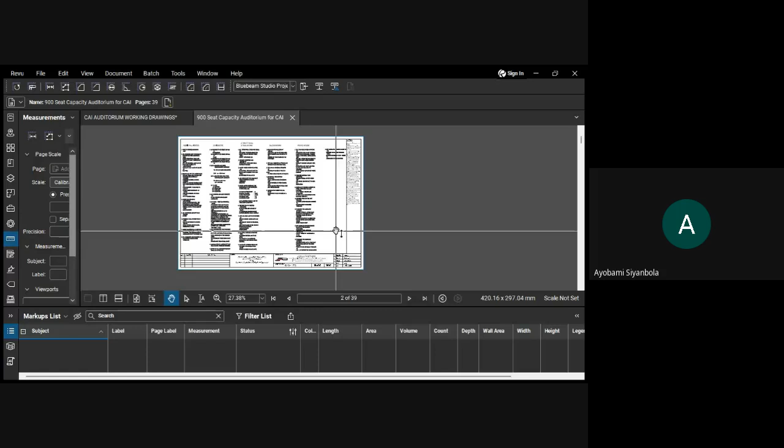So are we all good with that? If you have the drawings and the software, can we demonstrate that already? I will appreciate some responses though. We can just unmute and talk to react, to respond, and then switch the mic back off. I guess we are trying to make sure there is decorum, but even at that, it will really help us to be much more interactive. So do we get that? Okay, probably we should go over it again. All right, that's fine.

Okay, so we have launched the Bluebeam Revu software. Here is the interface. Even though it's possible, it may look different depending on your setup. All right, so there are two methods of accessing files, just like any other software.

So you come to File, you click Open, you locate wherever your drawings are. You click the one you want to work on and you click Open. The shortcut for coming to File is just Control O. When you do Control O, it brings up your folder and you navigate to the particular drawing. So this is me pressing Control plus O on our keyboard, and it brings that up. So that's one method, with the shortcut.

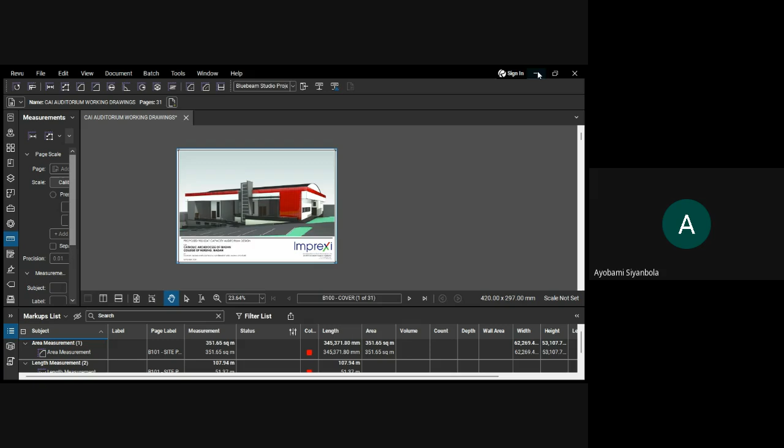Okay, sorry, can we all see my screen? Which of the screens are you seeing? Is it only the Bluebeam or... You can see the Bluebeam screen? Apologies, I guess I should share my entire screen so we can get this right. Let me stop sharing and I will reshare again. Apologies for that. All right, entire screen. So can we see the entire screen now?

Yes, sir. All right, so this is the folder like I was explaining. You come here, you right click on your folder. Is this the drawing that was opened before? Okay, let's pick another one since we already opened that one with the other method. So you come here, you right click, you open with. Opening with means using another software other than your default for opening PDF files. If I just click open, it will open with another software, which is Foxit PDF. So you come here and you pick Revu, and it loads your drawing immediately.

I guess we are fine with that, right? Yes, sir. All right, so this is the structural drawing. In making sure that... okay, let's just go over some of the toolbar items.

So now that we have loaded the software, you could see all these other items coming up. Initially they were blurred out, and you can't access them before that.

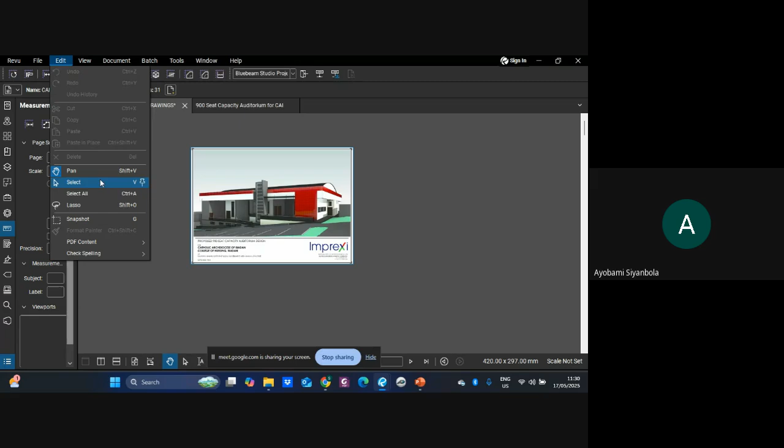All right, so for View, you can adjust this based on - one of the major things I would mention here is this full screen crosshair. Please activate it if you have it, so that it makes your measurement easier. Crosshair is a tool that brings horizontal and vertical lines on your mouse, which helps with precision in picking your item, just like in AutoCAD.

It comes preset, but if you are just installing your software, you won't have it as preset. So you go to view, you would have access to the full screen crosshair. Then we have grid system as well, and we have dimmer, and also as time goes on, we'll talk about some of these other things.

How it applies to measurements if you are doing measurements. All right, so we have documents, like I said, could rotate, you could shift, you could crop, you could do so many things on your measurement, on your documents as PDF files here.

So because of our time, you could do header, you could do footer. If you discover that, okay, there is a document that, oh, I didn't remember to add page, or this document doesn't have page, and it's a PDF document, you can do that easily. Yeah, you'll be amazed at what you would have.

So it has OCR as well. Like from the last session, I explained how OCR works. Even though presently we have some phones with OCR, this thing embedded in them. So OCR means a capacity to recognize text. It's a text recognition tool on documents or any file or pictures, whatever, such that you can sort of have access to text on the file.

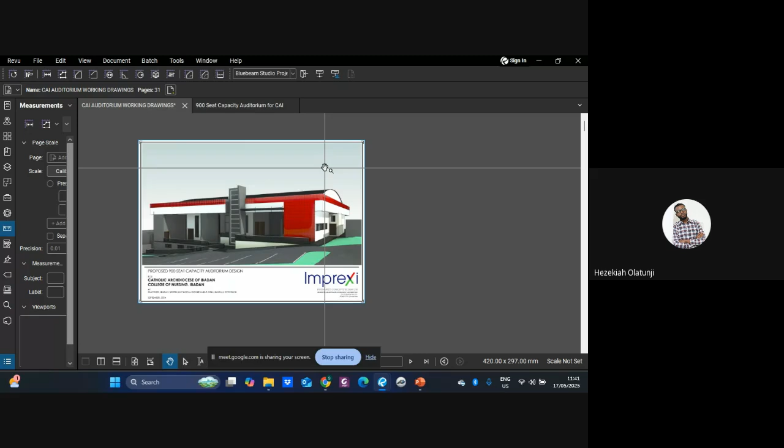Yes sir, actually I tried to import the PDF, and the page scale was showing, but the box to display the drawings page by page is not showing. So I thought maybe there is a setup that this particular thumbnail or something we are saying is not showing at all, like it's not displaying.

Is it possible you see something like this on your left? Or do you want us to come to that later? Okay, for the sake of others, maybe we should just come to that later.

Can you still hear me? Moderator, are we together? Yes sir. Okay, should we continue or? I think you should come back to it. Yeah, let's come back to that.

You can find your way around it depending on the time. But if you can locate the thumbnail session, you can possibly get what you need, or you could try another drawing as well. But that's strange, let's come back to it and we'll solve it.

All right, so let's go back to this. I think we were on ellipse cutout. So when we have a curved section and we're trying to cut out from the dots, as it were. So we have the count shortcut C - when we want to count an item, switches, toilet seats, windows, and all, we use this.

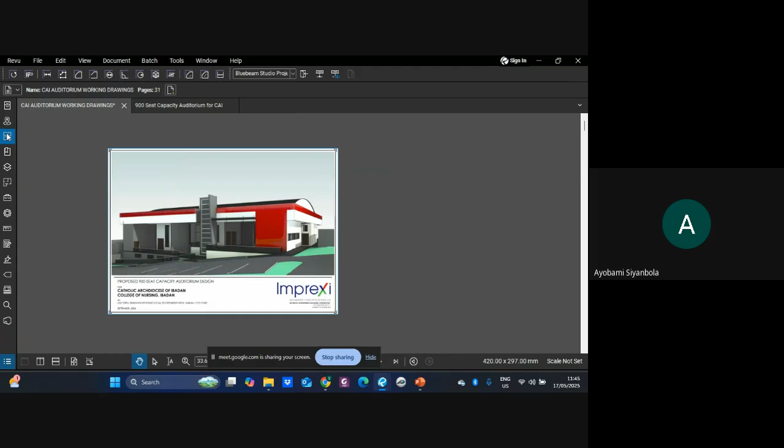So coming down, there is a section underneath. We're having this because I think from the last time, this will be the first time I'm opening this drawing again. From the last session, and still thanks to one of our participants, our guys that offered to give these drawings, because I made it an open call that, okay, don't let it look like there is a drawing that we can use and there are some drawings that we can't use. So it was at the venue that we got these drawings. I threw it open that if you know you have any drawings that you think we should work on, maybe it's challenging, or after this training I believe no other drawings won't be challenging again.

Yep, so okay, let me load this file - Sports Center. Just for some demonstration, we can see this, right? This Sports Center. Okay, we'll come back to the measurements.

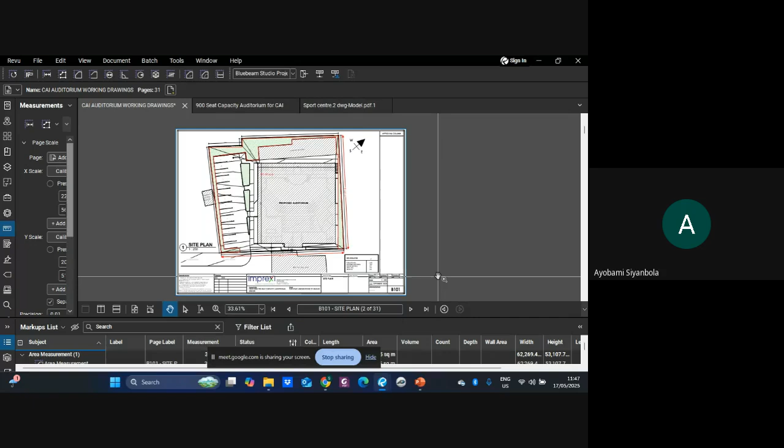The shortcut for that is Control right. When you press Control, then press the right arrow, it takes you to the next page. This is a workplace, so if you want to go to the next page on this workplace, you press Control right.

So using software and knowing how to use command shortcuts would aid your work to be more efficient. I know some of us understand what I'm saying. Instead of dragging my mouse, just this drag, that 2 seconds can impact my deliverables, can impact my delivery.

I cited an example to us from the last class. I thought the work had been done by a colleague and I was sure we would deliver. The client reached out to me some minutes past 6, the day before he was going for his meeting. He had even forgotten. I said don't worry, the work is fine.

Checking through the work, I noticed some slight renaming errors. The project had about 12 or 13 files, and about 2 of them were similar, so somehow there were mix-ups. Not that the documents were wrong, but there was a mix-up giving a file meant to be named D the value of B, and also...

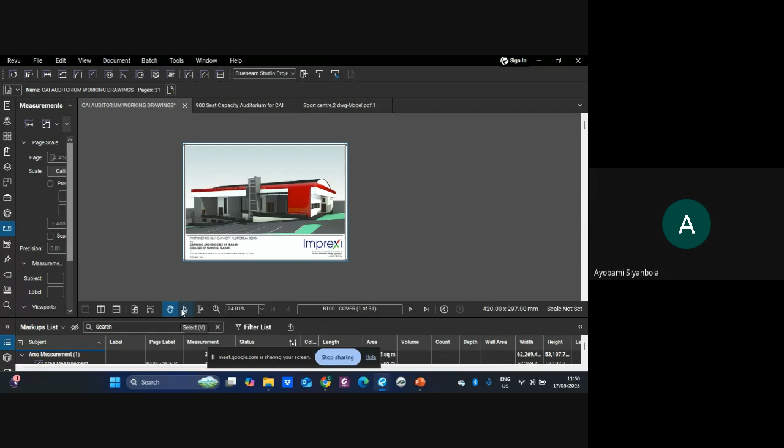Presently we have pan, this hand tool that moves is called pan. We also have the select tool here, so if you want to select something on the drawing or highlight it, that's the purpose. And this one can select text, if you want to copy a text on your drawing or design.

Usually you would need pan, because with pan you can click, you see the hand, and you can move around whatever you want to move around. Okay, do we have any question? Any question?

Mine is not a question, just a clarification. I've tried using Control and Arrow, pressing End, Arrow, and it's not taking me to the next page.

Click on the drawing, just tap on it like this, then Control Arrow should take you to the next page. It's not taking me. Okay, is your software activated?

Do you have any hatch on the tools, on some of the options? Is there a hatch on them? If there is hatch, no. Okay, we'll probably come back to that, but that's a preset. All right, any other question?

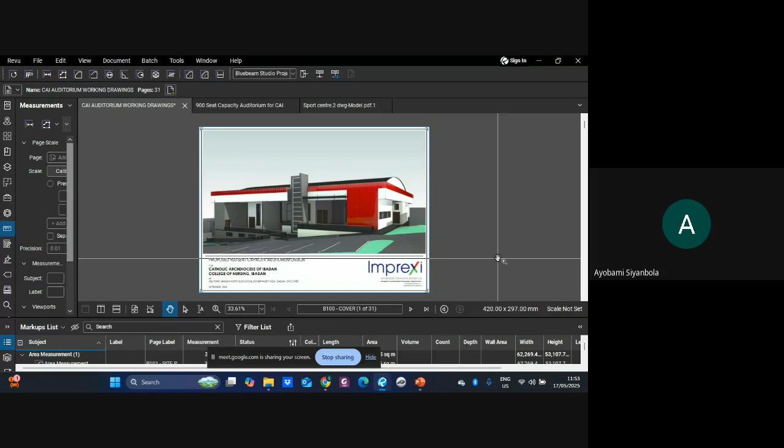So it can be effective and applicable to some other industries. Previous versions of Bluebeam, if care is not taken and your scale is not well set, can keep working and you'll get the wrong quantity without knowing. But even now, you can't do anything before you set your scale.

Let me attempt to measure the square area of this portion. So immediately I'm done, this is me picking area. Let me pick the rectangle, picking the 4 points. Immediately I'm done, what do we have on the screen? Apply scale to pages. So immediately I'm done doing that.

It is a must that you can't work on this without setting your scale. It's a very good way to safeguard us as quantity surveyors in making sure measurements are accurate, and some other software do have that in place as well.

Coming down, we'll come to the markup list section. We're having this because I think we did some things from the last session. Let me remove, should I delete them? I think I should delete them. So we can see that we are not having anything.

This session, if you don't have this, just come to this side on your system. Immediately you have the blue line, this thick blue line. Just select it and drag it up, that's when you have this section I'm about to explain.

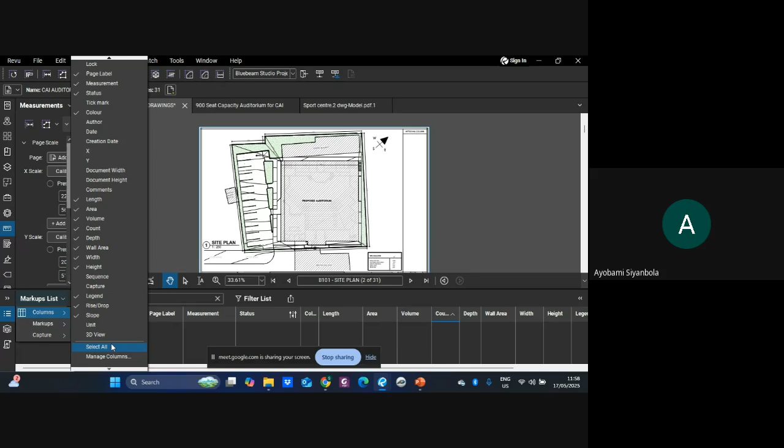So you can explore, and mind you we are still coming back to that. We can create our own column. And like I said from the last session, even from this Bluebeam view, without extracting to Excel or having Excel as a separate template, especially for projects that are not that serious, you can measure straight from your measurements and create a column whereby you can have your rates and a column for the amount, then export. Your estimate is ready. It's possible.

So we have custom columns. I guess we should come to that as well. Moderator, please let me know that. Thank you for helping note all these things. Please, what do you ask me to note? Custom columns, custom columns, all right.

So if you're on the same page so far, can we get a thumbs up or something? All right, there is a question here. Okay, a comment. All right, thank you everyone.

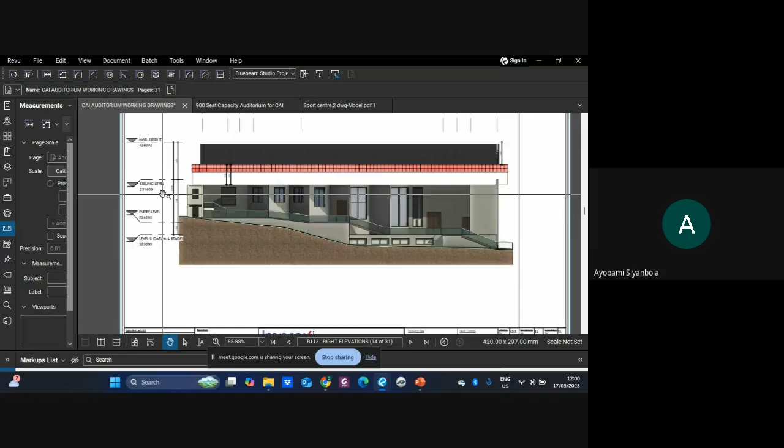Like I told you, for those that are just joining, this drawing was provided by someone, a participant, courtesy of QS Babatunde Quadri. So, this is to let us know that no matter what drawing you have, you don't have to be afraid, as if the resource person has a special drawing that he can use to get work done.

All right, so okay, I think we have the okay, but that's not too much. We have the schedules because we've been needing them. I think we have one other drawing. Okay, let me. Okay, this guy. Okay, I think we should have this one, a simpler drawing, regular drawing. But like I said, no matter what drawing you have, you can measure it easily.

All right, so, okay, that's fine. All right, so control home, we are here. Control next arrow, we are here. All right, so the other time I was saying that, okay, this is even better. I think because of the slants, we're saying what's the most important thing when we are dealing with measurement on Bluebeam.

Okay, I was expecting to see something but I'm not seeing. Okay, I now get it, because we have done the scaling. Just a minute please. I'm trying to remove the scale. So we have done the scaling before, so that we will understand some things.

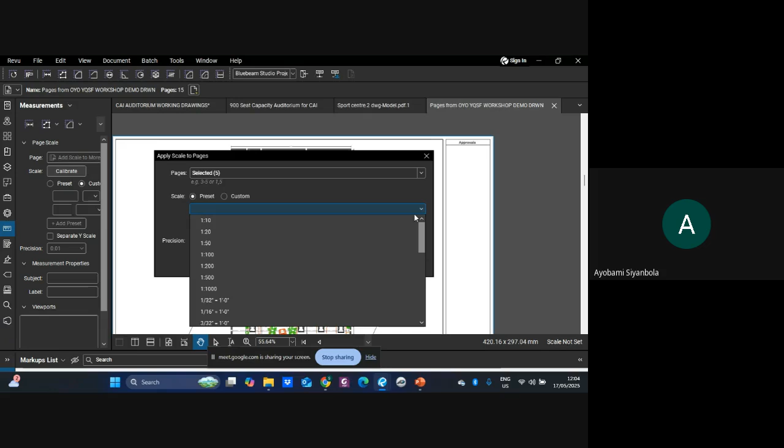Automatically it's on preset. Preset works when you have your drawings drawn to scale. We all know what scales are, scale rules. So just like we're digitalizing whatever we've been doing before to make our work more efficient, when you have your drawings to be 1 to 100, you pick that and you're good to go.

But yeah, I always have trust issues, don't mind me, so I would prefer to do custom scaling. When you do custom scaling, it saves you a whole lot of things. You assure yourself. So what are we doing in scaling, for the sake of those that don't know?

We have a drawing, and on the drawing we have some dimensions that are known already, but we don't know the scale the drawing has been drawn on. Just like in surveying where we talk about working from known to unknown, or unknown to known, now we are working from known to the unknown. Are we together?

So we are working from the known. How do I mean? We have a known dimension on the drawing. I want to know the scale so that when we work on the drawing, we are in tune with whatever the architect or designer has done on the drawing.

So immediately you come to custom, you have this option available, which means calibrate. We all know what calibration means, even on our phones we do calibrations at times. So when we click, this pops up. I intentionally leave this so you remember what you need to do every now and then.

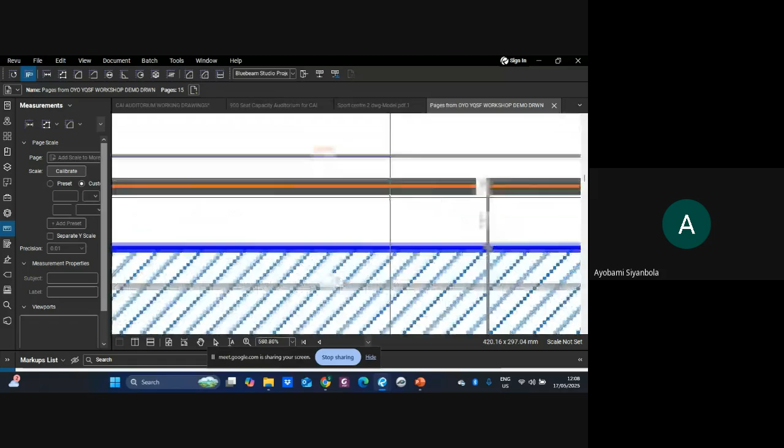So this dimension is starting from here, and don't forget we picked the dimension to be 30,450 millimeters. So we pick the first point, we go to the second point, and you click on the second point, and you define that point. Ignore this, there's nothing, don't worry about it.

So you input, because I'm working in meters, you convert it, that becomes 30.450 meters. Are we together?

Do you have any questions? Someone is raising his hand. Can we allow the person to speak? Please go on, Mutia Tokoyemi. Then Thomas is also raising his hand. Please, as much as I want people clear about this session, let's speak up. It's a mistake, ma'am, I'm not raising my hand. Okay, alright, Thomas, we can't hear you. Good morning, I just joined the platform now, it's not quite long I joined. Alright, okay, just follow us, the video will be made available for the parts you've missed. My name is Adigo Thomas, thanks for joining. Hello, welcome Tom, can you hear me? Yeah, we can hear you Thomas, thank you for joining. The video will be made available later for the parts you've missed, so just go along with us. Thank you for joining. So, do we have any other person with a question?

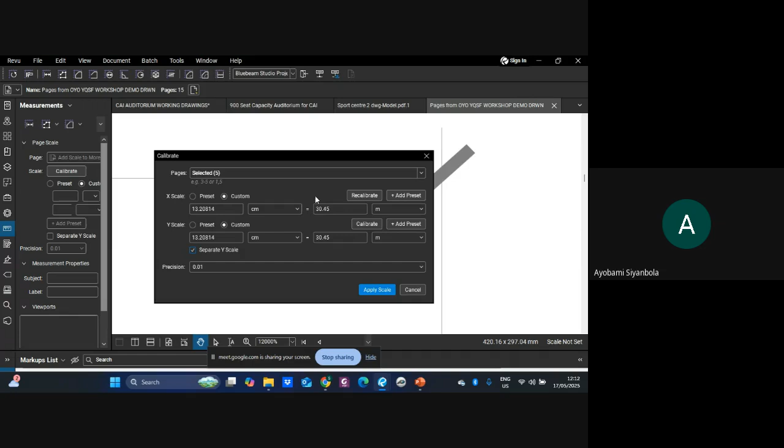Now you go to calibrate. You can see that this has been calibrated, it's just coming up to be recalibrated. If you have any issues with the first calibration you've done, you can easily pick this and go and recalibrate it. And if you think this particular calibration would be reoccurring on your drawings to come, you can easily add it to presets so you can pick them as you work. All right, so let's go with the Y scale, the vertical side.

Calibrate, same thing like I said last time: you select 2 points of a known dimension to calibrate the measurement tools. All right, so let's pick the longest part. This happens to be... is this the longest part? Okay, it's broken here.

I was wondering whether it's capturing everything or not, but I think we can still pick it. Pick this, 22.25 meters, or 22,250 millimeters. So you pick the first point of your dimension. Be very calm to pick that point so your dimensions will be accurate.

Oops, I think I picked 1458, but it's fine, you can actually pick the 1425. I just prefer to pick the longest one at times. All right, so for the sake of accuracy, I'm holding on to my control and picking that. So this becomes 5.8.

All right, so are we clear with that? I guess we should be. So precision can be set to whatever, but I've done 2 decimal places for my precision. All right, so this can be in millimeter as well. When doing millimeter, like we picked from the drawing, you just do 5,800. But instead of typing that long, let me quickly do it with my meter and move on. It's still the same thing, we are talking about efficiency here.

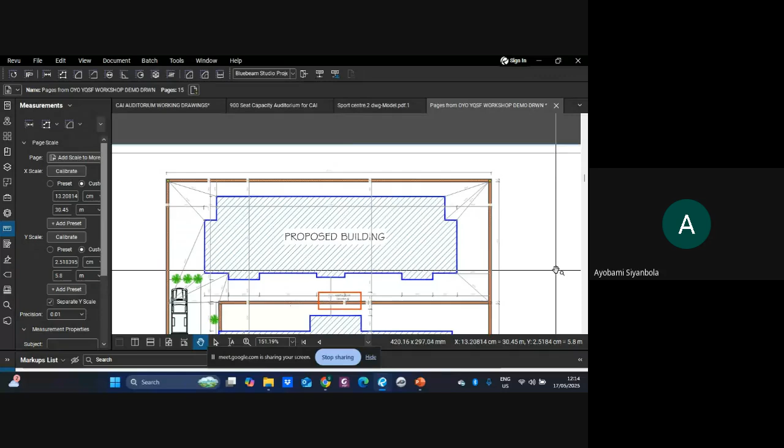We have the x-axis, so is equal to this, y-axis is equal to this. All right, so the cm and all is based on the movement on your screen, from centimeter. This is what it means. But now we have used that to determine and define the scale that we want the drawing and this page to be working with.

So now what next? I would advise that you click, you look for... let me see, I'm not sure we have the toggle. So let's say you look for tool, measure, length. But don't forget, when you want to dismiss a selected tool, you just press escape, that works. So let's say we want to do L, let me use shortcut Shift Alt L. You can see that I have my length popping up here already.

Are we together? All right, so now we want to confirm if our calibration did work, if indeed our calibration worked that time that we picked it. So this is when we will know.

Did it really work? Okay, with some little precision. So that's why I was saying the other time, okay, you have done 0.01 precision. But do you get the gist? Do you get what we are talking about?

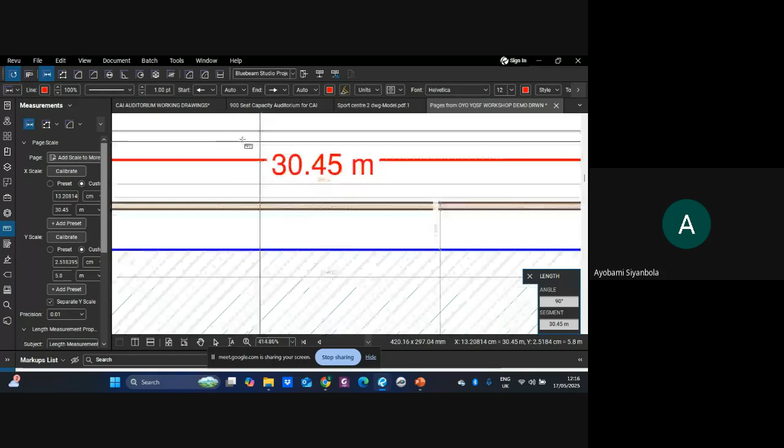So my L, this thing is still activated. Let's confirm this other guy too. 5.8. Can we see that? We could go on confirming. We've confirmed that one. Okay, let's confirm this small guy too. 0.1.

So I've used this drawing that has no scale set to explain that. So I'll go back to the initial drawing now. So there is a challenge here that I need to explain about. Okay, maybe we should just recalibrate. I think that's what we should do. Let's recalibrate. So this is what I was saying the other time.

You could say that, okay, we have done the scaling before. So let's say we want to recalibrate the x-axis. Just for the sake of emphasis, let's pick this guy, 44,623. And we can see that this guy is not on a straight line like the other one. That's why I said this is a perfect example for what I want to explain.

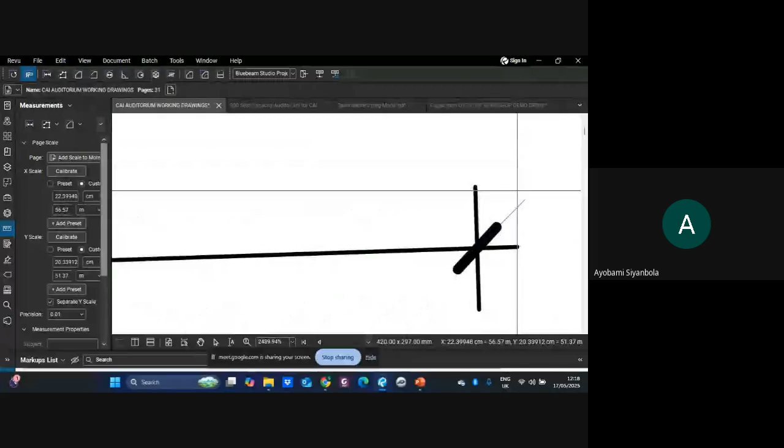So immediately, if you have the software, immediately you pick, we are trying to calibrate the x-axis now. Immediately you pick this guy and you are hovering it to the next point. This is what you have. But hope you know that that blue line is not the same thing as that black line. So you have to make sure that it is within the line of the known dimension that we are trying to pick, which is 44,623 millimeter. So how do you work around that in Bluebeam?

So just the same way like I said the other time, when you pick your control, but here, while you are here, I'm here now. So I want to click on my... I'll click on my shift while I'm dragging. You will hold your shift. You can see that the blue line is already here. So that shift, I'm still holding it. I'm telling that shift, I'm forcing that line to follow my path according to my mouse. If I remove my finger from the shift, you can see that it has disappeared. So let me press shift again and move the mouse. You can see that it's appearing. Do we all get that?

Yes, for measurement, there are no straight lines, like they are not following a vertically straight line or horizontally straight line. For bent lines, this is how we do it. So we have picked the point, and what was the measurement? I think this is it. Okay, let's assume that we have picked it. Then the Y scale, I think same thing is applicable.

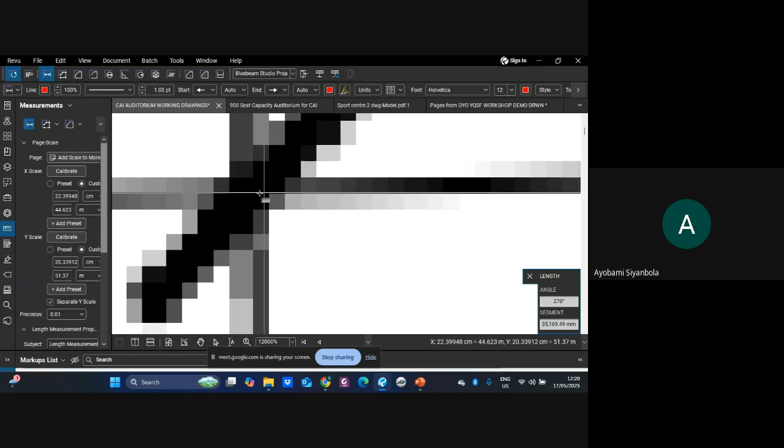So we apply the scale. Let's confirm that. Shift Alt L. Length is just for confirmation, just for us to confirm what we have done. If it's accurate, if not, we'll pick again, because there could be some interferences. Okay, yeah, so this is okay.

Let's just leave this guy here and let's recalibrate it. It's even good that we are experiencing all this, so that when you encounter issues, you will be able to recall what we have done to solve them. Okay, so we pick this guy. Don't forget we have this to be 44.623 meters.

So don't forget we are here hovering here. You hold on your shift on your keyboard. So we have 44. Okay, it's here already. We apply the scale. So can we say that this guy has changed, even though it's not what we want yet? So we go again. So that means if you're having that, it means our selection is not yet good. It has to be center lined. Are we together?

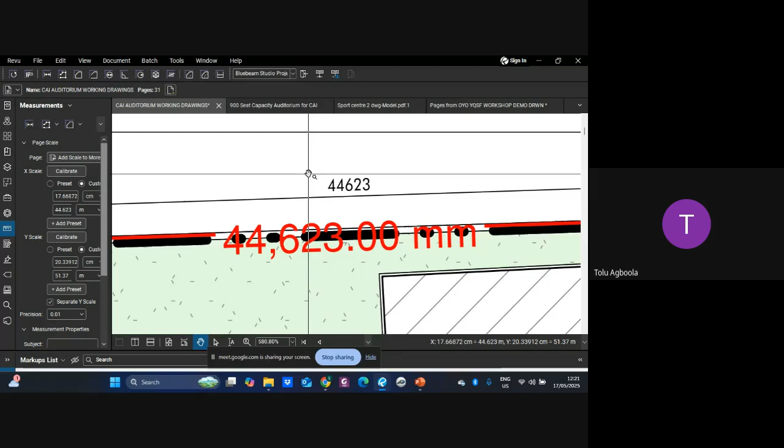Yes, okay sir. Or could it be that the vertical is okay? I think we are good. Oh, thank you, coordinator. So do we get what I'm saying now? I intentionally left that as you're adjusting your scale, it will keep changing. So if you measure any other line, even though, I think we should, let's recalibrate our Y scale as well.

Okay, just like we did the other time, I think we should do this again. Shift Alt L gives us our linear, just to confirm.

So we've picked that. Of course, this shouldn't be accurate based on what we had. So this guy is 53.6, blah blah blah. All right, so what do we do to align it with what we have?

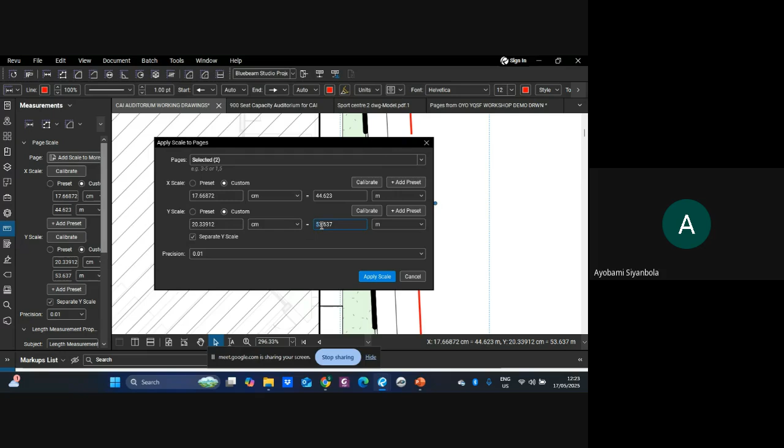So you could use this guy to select it. It's already selected. You could move with your arrow - usually I recommend moving with your arrow so that you could drag with your mouse too. So this guy is meant to be 51,637, and we have defined it to be 53. So you come here, you say, okay, it's not 53 again, it's 51. And you are sure.

Okay, we have that. There's a 0.001 issue, but you could go back and adjust accordingly. Any questions so far about scale setting? I guess everybody should be good with scale setting because it's paramount that we get it.

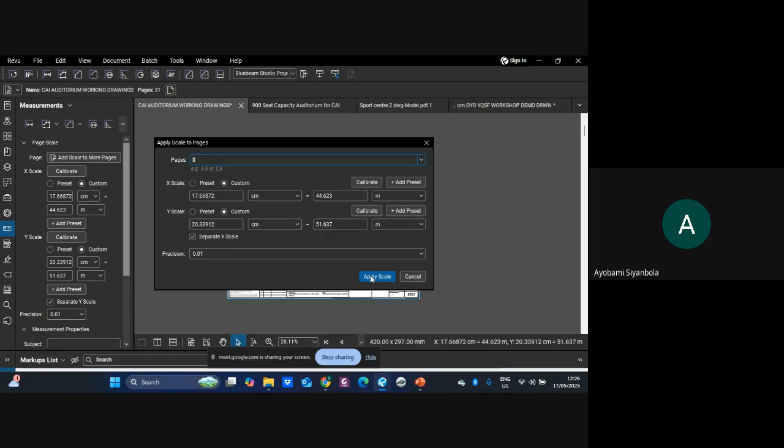So, add scale to more pages. Next page is our page 3. So we select 3, and you could add a range, but let's say 3, and I apply scale. Immediately I come here, you can see that we have a scale already.

But the other time I was talking about caveats, and we have to be aware that there could be different scales - at least, of course, site plans to floor plans. So let's just, I think we should test something. Which dimension should we pick?

We have overall here. Okay, maybe we should just pick this guy, 117,373. So don't forget our shortcuts, or we could pick on the length. But Mark, are we together? Can you see what I was talking about?

Yes, sir. So that means the architect didn't use the same scale, as it were. It's possible that along the line you would still see a scale that is similar to that site plan scale, or it could be that some of the other pages are similar. Okay, let's just dwell on this a bit. So let me set this scale.

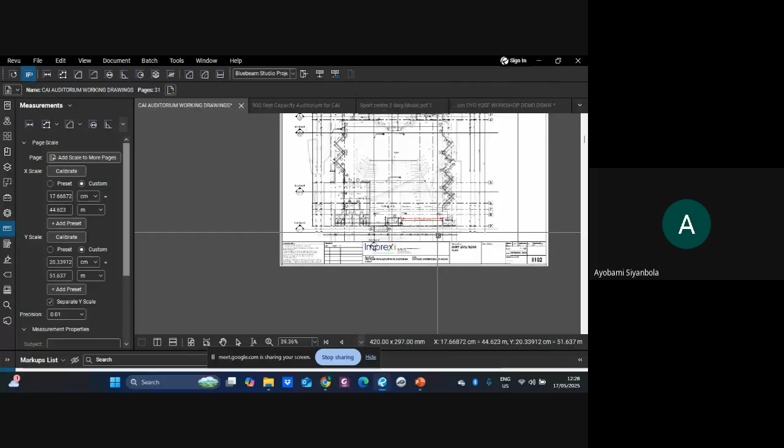So we have a scale set already, so let's set this scale - let me have this guy up here. Let's calibrate this guy to 35,892.

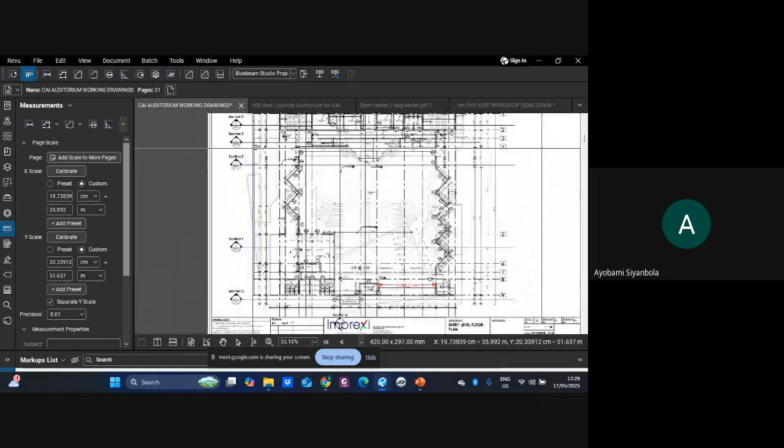So that's that. Let's do Y scale as well. Okay, 23,210 - from where? This one, yeah. And 3... 210, right? Okay, this guy is still not well calibrated.

Okay, you guys have seen the culprit. I hope that was the culprit. Did anybody see what I saw? Anybody? No, can you explain? We did not see it.

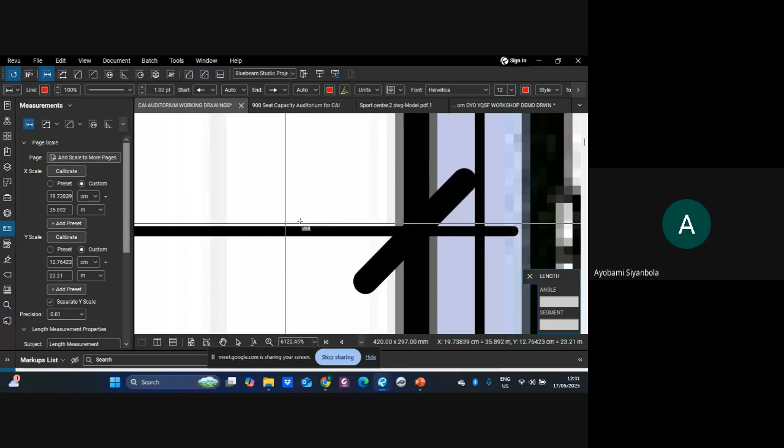Okay, let me explain. Utma, are you still with us? Because you asked a very beautiful question. So this is what we did before, because I was wondering how we started from here. Do you get to determine this guy here? And we kept getting lower than what we have here. We shouldn't be. So apparently the architect's dimension is actually from the line behind this guy.

Okay, so that's what happened. Yes, yes, that's what happened. Perfect, right? All right, yes sir, so we have this one set like that.

So let me now add more to scale, something similar. We can say that in the outright sense of it, it's possible that, of course, any good architect wouldn't have drawn a site plan at the same scale as a floor plan, because they are not meant to be on the same scale originally.

So now we have the entry level floor plan, so we have applied this scale to the next page. Did you get what I did? Add scale to more pages. Okay, next page is 4. Apply it, and let me pan back. So control arrow, we have this guy. So we have a scale from the previous page here. So let's just check.

All this we are doing before because we have to be sure. Like I said, as a quantity surveyor, you don't just say because I've applied it, you keep working - it doesn't work that way. Still not the same thing. So what do I advise? I advise that you scale this one separately. But when you have a very perfect drawing with scales, when you apply to more pages, you can even do that for all your drawings, and you go there, you check if it's aligned, you work on it. If not, you recalibrate. It doesn't cost you more than 5-6 clicks maximum.

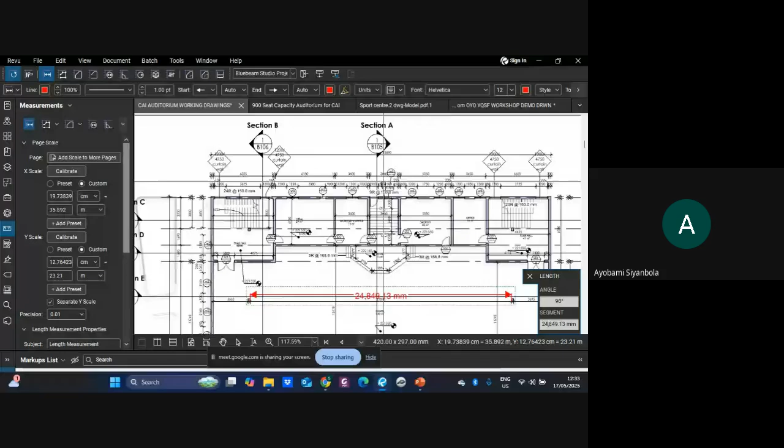So are we together? That's a good question on scaling. Any other question? Okay, no problem, let's move on. We've gotten that on scaling. Okay, so we have scaled this guy, which is the site plan. I think I was taking us through this the other day.

Okay, so next thing I would suggest that we do together would be that let's quickly create something related to a taking-off list together on our Excel. Okay, so while we're waiting for that to come up, I would want that to be interactive. I guess the internet is interfering with some.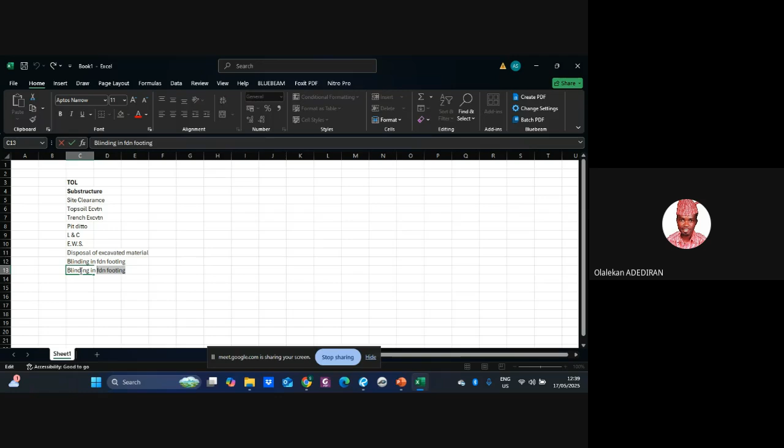Okay, which one are we agreeing to? I just want it to be engaging, this is what I'm looking for. Okay, so concrete after blinding, foundation. We say concrete, okay, blinding, it's concrete foundation, then block work in foundation.

Block work. So what about the... you know, we have dug our pit, we have excavated for the pit. So where do we have pit?

Okay, for base, rather for column base. Yep, I get it, all right. So then the starter bar.

The starter bar, formwork. Yeah, the starter bars would be, let's say, reinforcements in. Let's use the right words at least. Yes, we say starter columns or stub columns. Okay, stub, thank you for that.

Okay, all right, so the formwork to edges of column base. I'm expecting others to contribute as well. Concrete in column base. Concrete in column base.

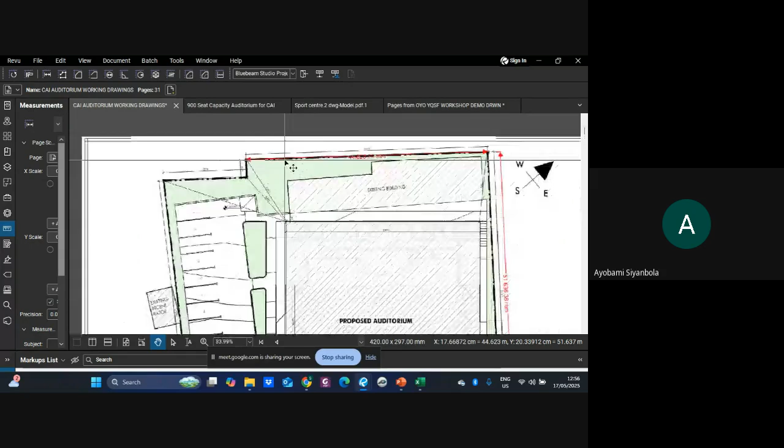Okay, so if we are still going that route, just like I said the other time, traditional measurements and all, we still have to be picking, and even for this length, this is our site layout. So this is what we need for us to get our site clearance. And even for this length, we can't get an actual accurate length, so we have to sum up all these slant lengths, because we are not just imagining that the architect has given us the dimensions and we just book them one after the other. But we are not doing that.

So what tool do we use from our measurement tool? Which of the tools for measurement do we use for that? I'm asking, please. Area. Okay, is that correct? Yes it is, because of our time. So what do we get, the area of this site?

Okay, so let's use this there. We have picked that one. The principle now, the trick, not really a trick that I mentioned the other time, I don't know the right word to use for it now. What did I say? That when we're having issues with this, you are putting your mouse where you want to click next, but your line is not following to that place because you have a slanted line. So what do you do? Anybody? You press shift. You hold your shift and it picks it. Naturally, your lines are meant to be at angle 90 degrees and all.

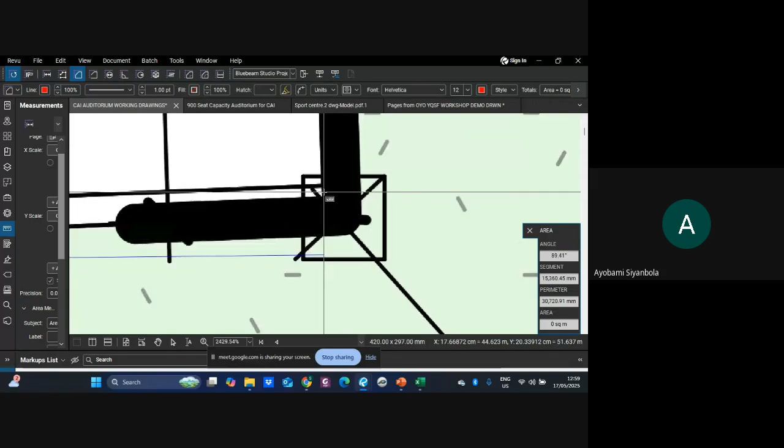You could see that from this, is it up, down, right on my screen. And we see the angle of this present line. What is there? Yes sir, what is the angle? The angle is 90 degrees. Yes, thank you sir. And we are coming here. Immediately you press your shift, what is the angle again? What do we have as the angle? I'm pressing my shift now. It's aligned to whatever angle your line works with, which in this case is 89.41 degrees. So that's just to explain some things to us.

So I'll pick the next one. This one is bent again, so you have to still use your shift and check it out. Because of our time, if you have questions, just note your question, then we do that. So pick this guy, are we together? You still maintain your shift. Are we together? Yes sir. Maintain your shift, so you can see that this guy is moving as I'm moving. So in fact, the principle is that you close up your measurements whenever you are doing area measurements. You close up your measurements where you have started from.

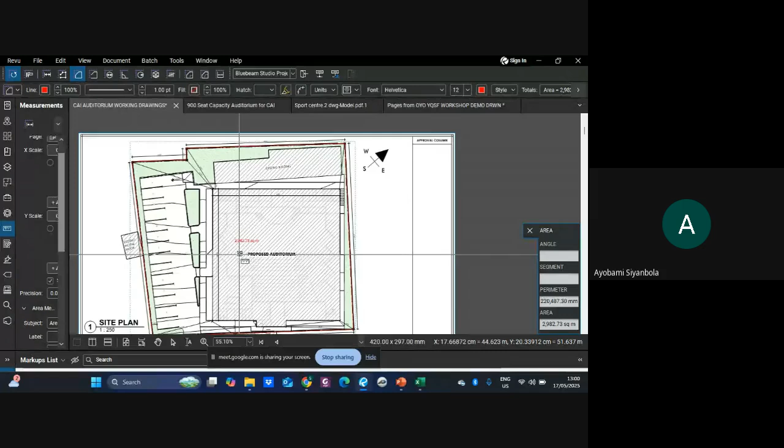Do we get this guy? You look for it and you click it. Do we get that? I'm not getting response. Yes sir. All right, so you do that, that's one. I've not done that. Or you just press enter at your penultimate point to the final, if you are not sure you are going to pick the line, you just press enter. What do we have, please? 2,982.73 square meters. All right, so we've gotten that.

For this, and don't forget I'm saying something about this guy - these are the measurements that we did the other time.

Immediately we picked that area measurement the other time, it's recorded as what? What was our subject here? Area measurement. So when you click this, you are referring back to this measurement. And we can adjust that.

It's always better to even name your measurements so you can see, because I have site clearance on my own listing. As much as you are naming your subject, you have it in your cache. So when I click this, this one changes to area site clearance from area measurements. You remember the other time that I said we should set up our columns and all - these are the reasons for the setup. So I have my measurement to be this, this is my information.

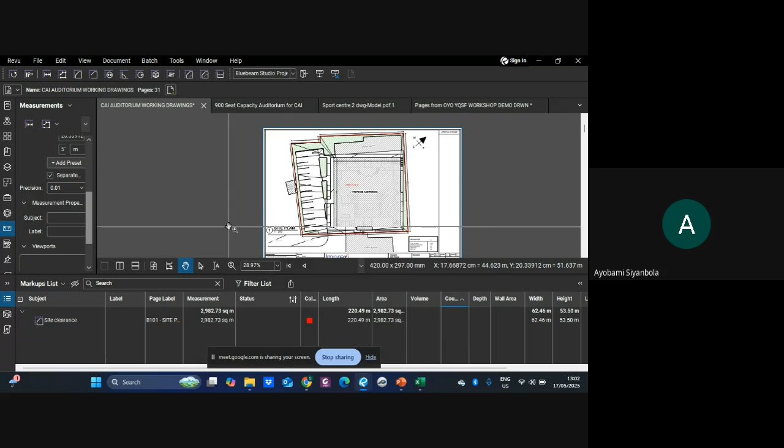There is a little bit of a glitch on my Excel. There is an automation that we should have here so that we are not having issues, but while at that, we can still do some things.

Let's say we would input manually, pending the time. So let's say this guy is what again? 2,982.73. So usually if I right click, I should have my Bluebeam quantity takeoff. So from this guy, I can go there and pick my area measure.

I will still fix it before we leave, I guess it's the internet messing up with it. So do we have any question? Is that one clear?

Let's say this is a meter square. Okay, let me do this guy there. Those are our elements - don't forget we are dealing with substructure.

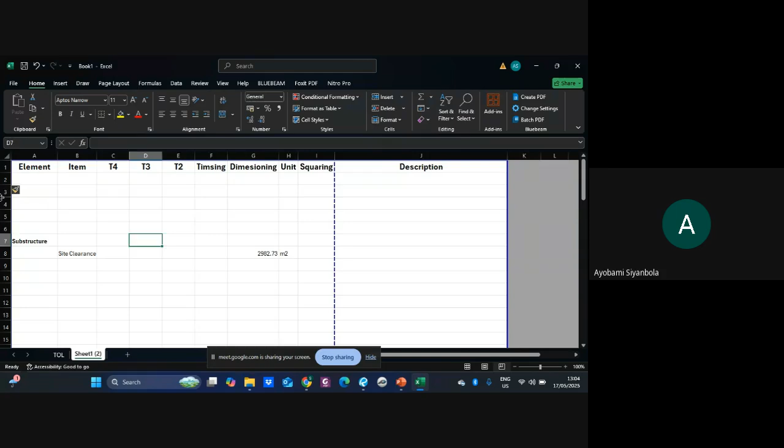All right, what next on our taking off list? Topsoil excavation. But I hope we know that - what's the unit of measurement of topsoil excavation? Square meter. The depth.

What did you say, setting the depth? Yes, you have to state the depth. So that's for your academic proposal, for the bill purposes too. But you would agree with me that this guy and this guy, they are the same, right? Yeah. So we've done that, right?

Okay, so let's deal with trench excavation. If you have dealt with trench excavation, don't forget where I said that we are trying to solve a problem - 50% of our problem as per this measurement of substructure is solved, or even further. We all know that we would eradicate repetitions as much as possible. Yes sir.

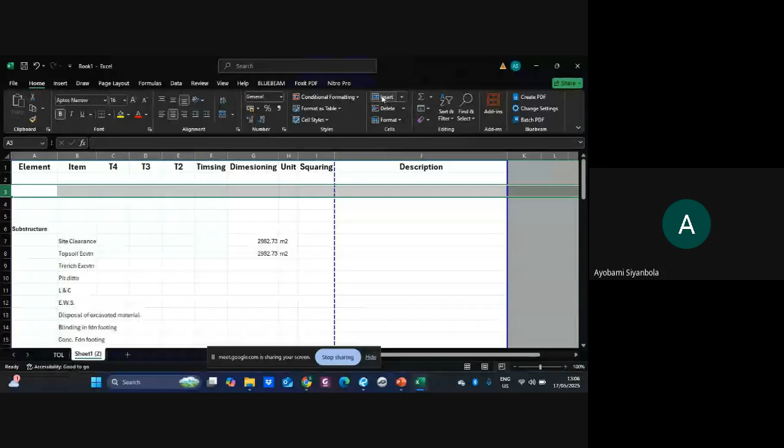All right, so we would have - let's go back to Bluebeam. So when we want to deal with trench excavation, two ways. When you have your structural engineering drawings - just a minute - giving you foundation layouts, best way is to deal with this guy, foundation by foundation, but because of our time...

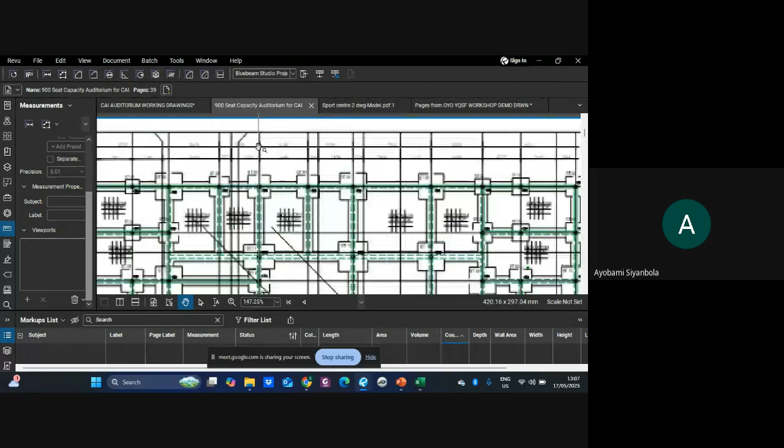So I think this one usually is better - that's the structural here. Yeah, usually in structural drawing, so you are meant to make adjustments, because for this one you would have to measure over column basis for this purpose. But do you understand what I'm trying to say now? Yes, sir. All right, so what do we do first?

This guy is not to scale, we scale, right? Custom, we calibrate - you've been following us before now, you would understand this. So let's just pick this guy, 3680. Okay, for this, let me just change my stuff to millimeter. 3680, then we do the Y scale to be.

Do you have any other 3680? So I won't have to. Okay, let's pick this 6204. So we apply the scale. Let's confirm. Are we good? Not entirely.

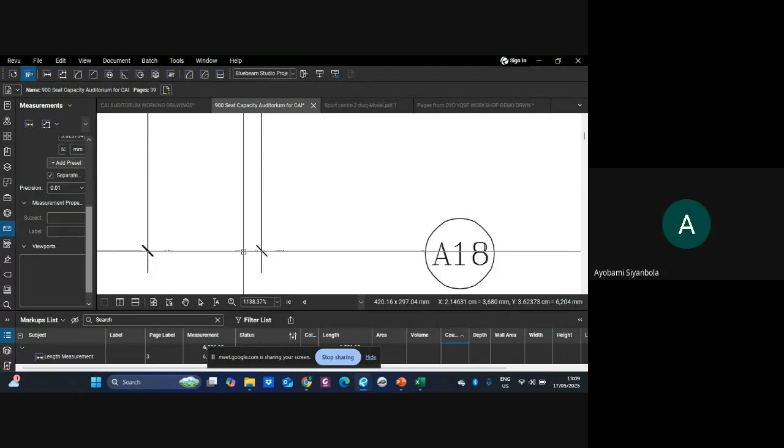Let's pick this first and see. 4590. I doubt that dimension is looking way funny. Automatically your mouse will hover around depending on the way the design is. This seems to be it.

All right, so what tool do we use based on the explanation I gave the other time? Can you hear me? Yes. Okay, so what tool do we use now? We want to do trench excavation, so we need our girths.

I think poly length, the second choice. Poly length. Okay, any other suggestion? There is no wrong or right answer, as it were. So poly length, like I said, let me just demonstrate. Like I said the other time, poly length.

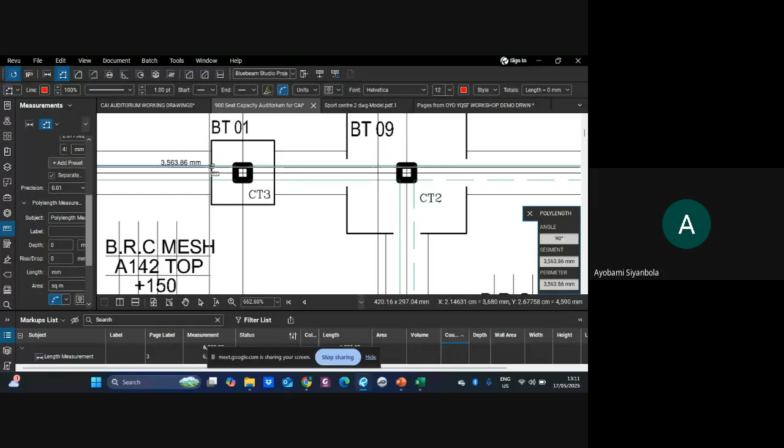This is poly length. Poly length will give you, let's say, okay, let me start from this edge. Let me just pick. Okay, let me pick to this point. Can we see what poly length is doing? Yes sir, it's adding up all the lengths.

It's not adding up, as it were. It will add up, but you would have your step points. Yeah, from each point, it's giving us the dimensions too. Yes, just like I explained the other time.

So for me, I would say that we'll do perimeter. So you could use poly length if that's what fits whatever you want to do, which is fine. Are we together? Yes sir. All right, so I would say perimeter, but we won't use perimeter.

Can anybody tell me what we are going to use and why? Anybody, please? I've explained this the other time. So normally we should use perimeter. Okay, so this is okay, maybe I should make it elaborate.

We are looking at internal girths and external girths, right? I guess we should do that separately. So for the external girths, we have to use perimeter to get this thing. Okay, but we are not using perimeter. I'm suggesting that we should use another tool. So which tool? Do you think we are going to use, or am I going to suggest? Then why?

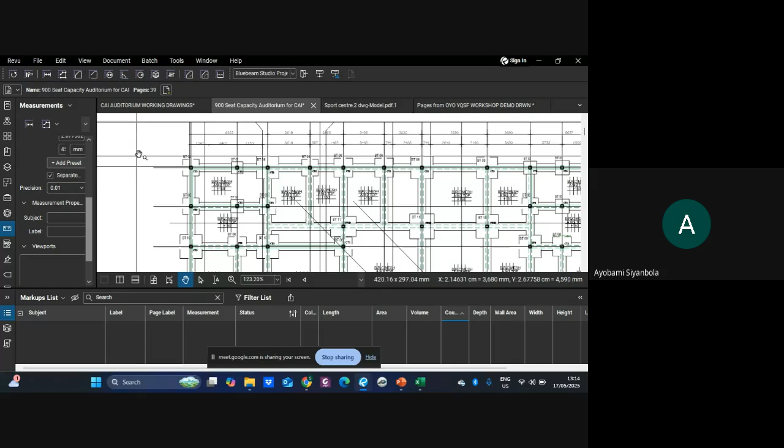Yes sir. All right, so for this, I said the other, so this is area. Immediately we pick this, this guy will be activated. So we come here, we name whatever I want to do. So for now, I would say that I want to get our external girths, right?

Are we together? We are getting our girths first. So let's say external girth, that's what we are dealing with. This guy is a meter, so whatever you are doing, these guys are there. So okay, so now,

Just follow me. If you have a very short question or something about the process, you could possibly ask.

Don't forget that we are still going to be dealing with oversite concrete. So that's one of the reasons this thing is, anywhere we are dealing with superficial stuff, just do your measurements, take your area, have your perimeter easily.

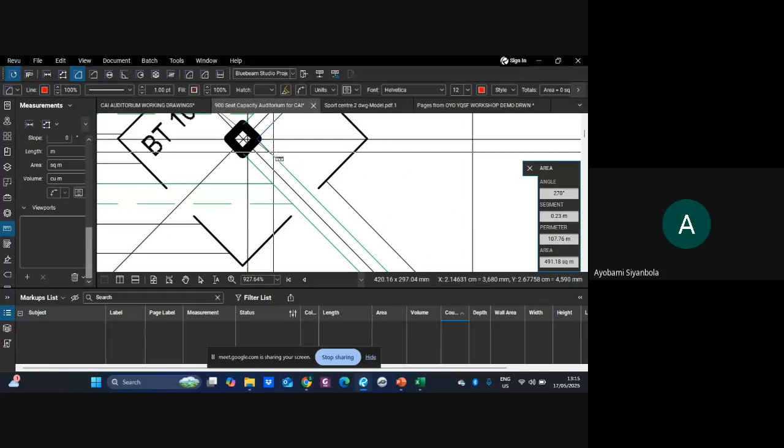Are we together? Are you seeing the way we are picking it? Yeah. Are we together, please? Okay. Yes sir, okay.

Since these are standalone, this BT02, what will confirm that? Oh, there is basement actually. Foundation layout. Okay, I think we should go ahead with this.

Is QS Quadri on this call? Is it still on this call? I don't think so.

Just a minute, please. You know, most times when we are working, we work hand in hand with all these designs and drawings so that you understand what you are dealing with.

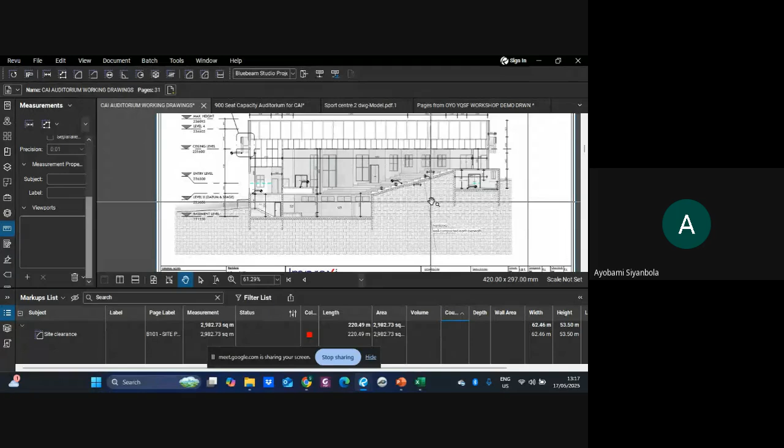Okay, there are basements. Is this field? So whether there are basements or not, it's obvious that we'll be excavating the points, and these are looking to be standalone. I think we'll be excavating this guy as well.

Length, see what I've picked again. I've picked length, but this thing is still the same, two different quantity. I mean the subject name, you can see the grouping. Are we together?

Can we see the measurement? Yes, sir. Okay, we can see this addition. We have the summary already of this 3.6 meter that we just picked, because it's still part of the external girth that we are dealing with. So it doesn't have to necessarily be monotonous, just looking for the edges alone. At times you would have that.

Okay, so I guess we have this guy already. Why we have this thing already as well. So let's quickly run through the internal girth. Are we together? Yes, sir, yes sir. Okay, thank you.

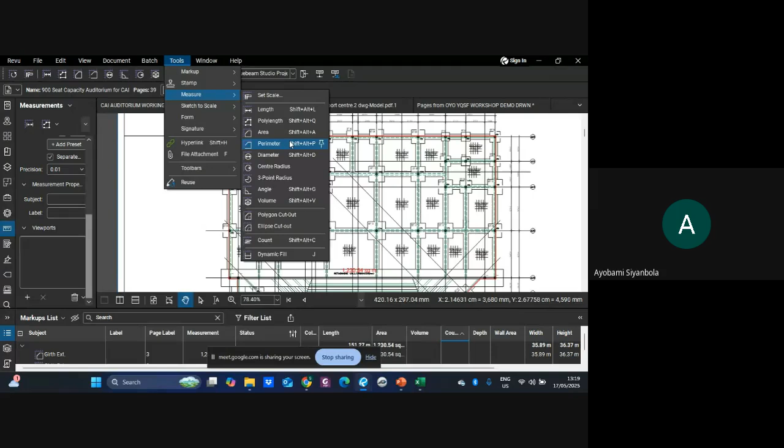So for the internal girth, I would suggest there's no tool that we want to use that we can't use. We can even use length and be doing it, and you have your summation later, but I would suggest perimeter. You would see why now. So since I've picked perimeter, my subject will be perimeter measurement.

So I will change this to be, let's say, girth internal, such that whatever you pick, it registers. So let's pick this guy from this guy. Don't forget that I've said that we are measuring them over, we can do the adjustment later anyways. So I've picked this and I'll press enter.

Let me change it to meter. Are we together? So I've picked that one. I'm picking this, just following through the excavation. The excavation looks to be stopping there. I guess there is a ground beam

or a retaining wall there. Yes, there is, there's a retaining wall. That's why this guy is stopping there, it's connecting to the retaining wall. Okay, so same goes for this guy. Have an excavation spanning all the way.

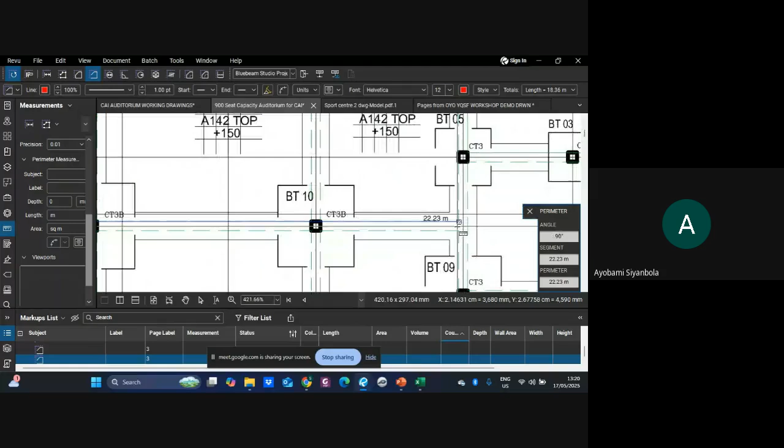You press enter. Automatically, your enter is more or less like this guy should stop there, but I think we should not do that. Your enter is more or less the command of saying okay, I'm done. I'm done picking this guy, so you pick this guy, you enter.

Just like the same way for Plan Swift, like digitalize it, when you digitalize your measurements, when you digitize it, so you have this guy. Are we together? This place is too quiet. Are we on scene? All right, so you make sure that everything is being touched.

Okay, I guess we should just push it to the retaining wall side. You have this guy running over this place. I have this guy running all the way as well. Which other one?

So this short span, you just pick them. Have this guy running all the way. Yeah, okay, stops here.

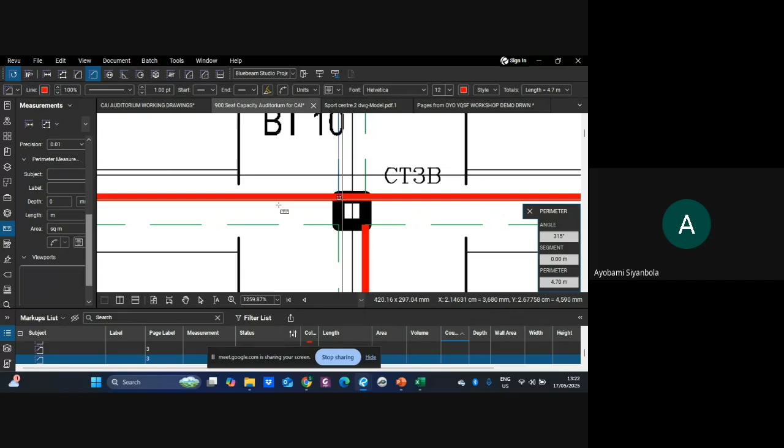I've picked this one, so this guy stops here. So you make sure that everything has been captured. The ones yet to be captured, you capture them easily. You don't have to be bothered about, okay, where are the measurements going. Like I said it the other time, it's more or less like you're building a database by your clicks.

And I guess upper parts we are good, so let's move to this guy. Not sure if this excavation is cutting across, or I think it is. Okay, these are the wrecked floor areas. Okay, I get it.

This guy, you can see the beauty of using perimeter now. So we could continue this guy from this place to this place. We could, and we can easily go this way too.

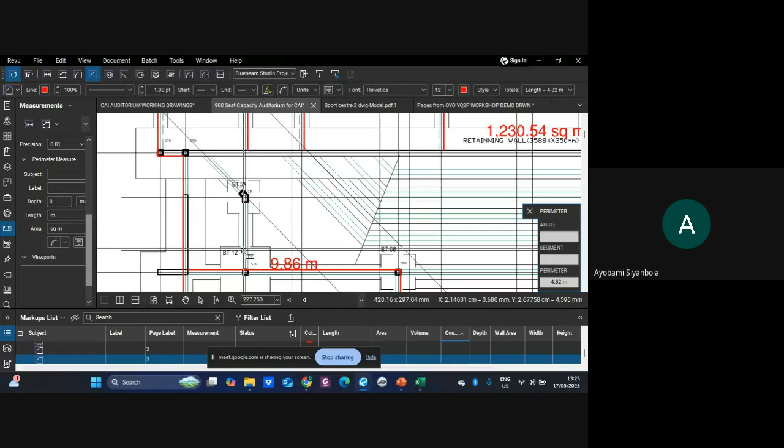So this guy comes there and go back there and goes back there. So for direct flow, I would say I don't think these guys are connecting.

Okay, so for this knowledge purpose, let's just limit ourselves to this. Are we good? Are we together? Yes, sir.

All right, you save your item by doing Control S. Oh, okay.

Okay, apparently my reuse tool wasn't on, but I would show us this. You just highlight this guy, highlight everything I have done so far, and you still come here to the subject. So you do girth, then internal girth. When you click this subject, it separates it for you easily.

So what was our total internal girth? 276.82. Does it look something good compared to traditional way of picking? Does it make sense, please?

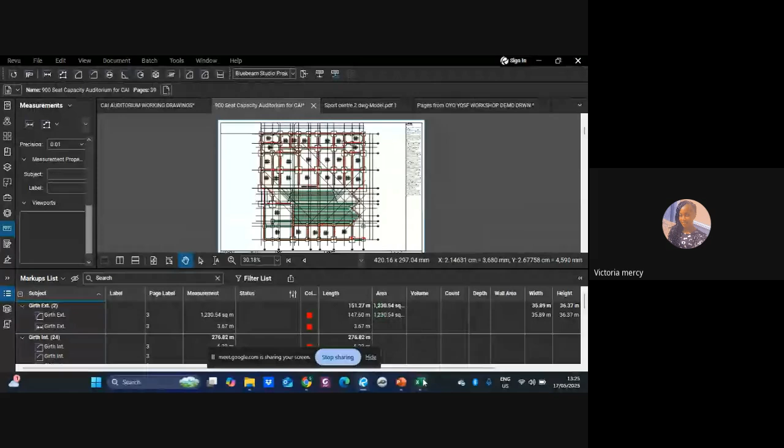Yes, sir, it's custom. It makes sense, it looks good. It looks simple somehow. Yeah, that was the purpose.

Well, I have a little challenge. Sorry, what's the challenge, please? I'm unable to put in the subject. The subject is not even responding.

Really? Click. Yes, okay. Have you measured? Have you done any measurements? Yes, I did. Okay, click on the measurement, whether on the screen or on your downward board, like this guy. Just click on anything. Click on the measurement. Okay, click on.

So you should go to your measurement side, whether on the left or the right, and input your subject. Input it, you can even label it to the ground floor, GF. If time permits us, we'll move to this. Which other drawing now? I think there is ground floor, first floor there, so that we can easily explain the ground floor, first floor, second floor, third, etc.

Has that fixed it? Yes, sir, now it's active. The subject is active now.

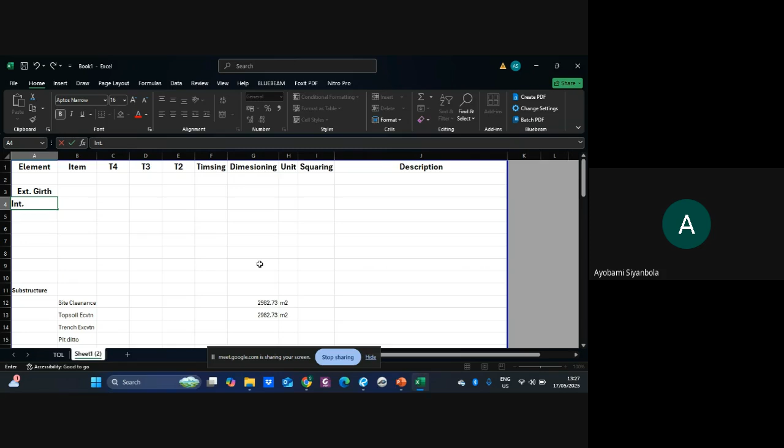Okay, so whichever item you are picking, as the item is being picked, if you change the name and all, it will be affected on the item. That's why the other time when I saw the internal girth work, it was just blank. I selected all the blank. You can shift-arrow select, or you can pick them one by one and change the name. It will definitely be affected.

So, like I said the other time, where is the structure drawing? We could have the quantity takeoff straight up from Excel according to the plugin of Bluebeam, but of course let's just go manually now, because we are doing training, and it's looking like it's taking time.

Imagine when you interact with the system, with the software and all, you would say that. So our external girth, what is our total for our external girth for what we have done?

Responses, please. Are we together? Yes, sir. I said, what was our total? 151.27 meters. Thank you.

What about the internal? Total for the internal? 276.82. Sorry, 276.82. Right.

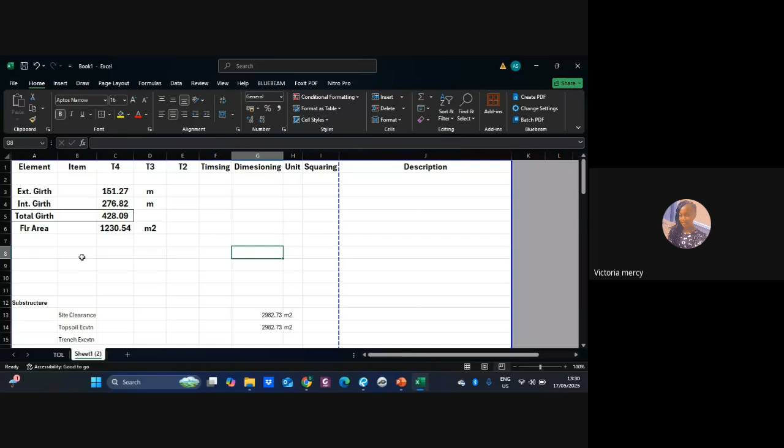Okay, all right. Could you please mute your microphone? So now we have gotten our girths, we need our width, and we need our depth, right?

Yes. Okay, so I'm trying to get the session. You don't have the NGL here. In this, okay, there's a retaining wall.

All right, so I guess we have to possibly come to an assumed depth, maybe based on this guy. I think they are like 1.2 from the edge of the base. I think the depth is uniform.

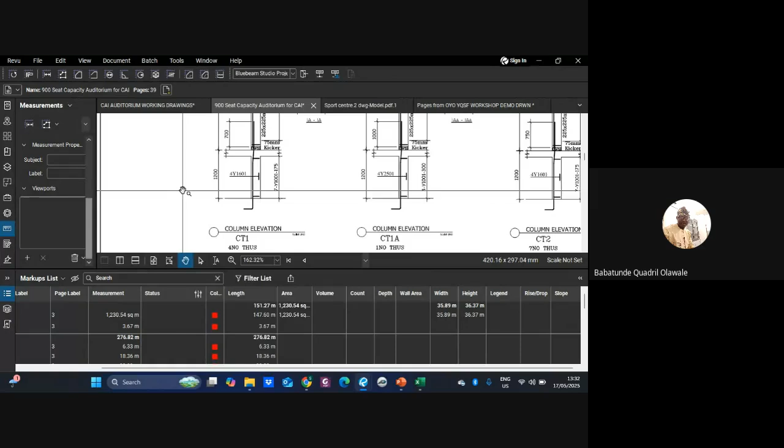Well, yes, you are right, but you don't just pick this now. So we can't say we are dealing with 1.2 as it was. It's a pit excavation. Okay, so now we have 1.2, this is more or less from the top of the base for the pit. Do you get it, for the column?

So we have base to be this. We have blinding to be 50. Let's see if they are the same. Okay, this guy is 300. This is 50, this is 400. 450, okay, let's say 450.

Plus, yes, we are still assuming anyways because our NGL is not stated, natural ground level. So it's kind of a challenge, but since we have that, I was hoping that we see the section for the trench itself so that we know the width and all. But you know, as QSCs, there are some assumptions that we'll make that would help our things.

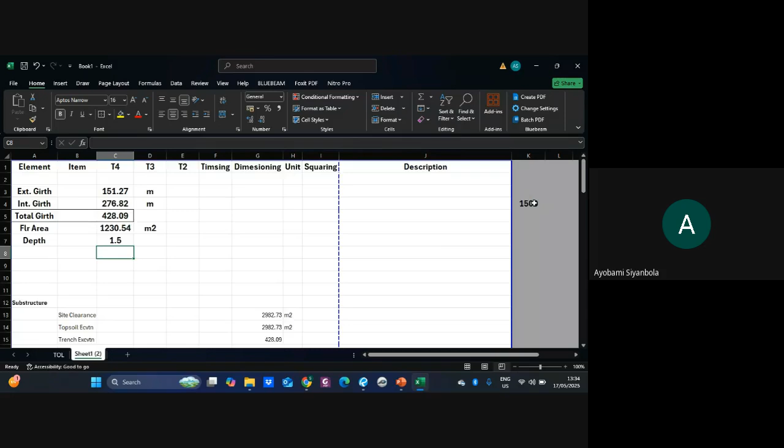Let's say we reference. Okay, please go ahead. Please go ahead. Please go ahead with your question. Okay, what I want to ask is

this waste calculation that we are presently doing, how do you, does this Excel page, did you open it via this Bluebeam, or was it separately opened? Okay, so thank you for the question. Like I said when we started, I was saying something about templates.

So our measurement is being done now. I can't... no, that's what I'm explaining. Our measurement is being done in Excel.

And I already said that there is a way you can adjust your plugin such that you can even measure in Excel. Right here, you have a Bluebeam plugin that directs you to Bluebeam, then you measure, then automatically it changes. Can you hear me, sir? So, but this is Excel, this is Bluebeam.

So Excel, we are using. We have extracted some data from our Bluebeam, so we are using Excel to run our measurement.

My question is, if you open that Bluebeam, you can link Bluebeam from Excel. That's what I just said, sorry the network is quite bad here. Don't worry, continue with your presentation, we'll get back to that later.

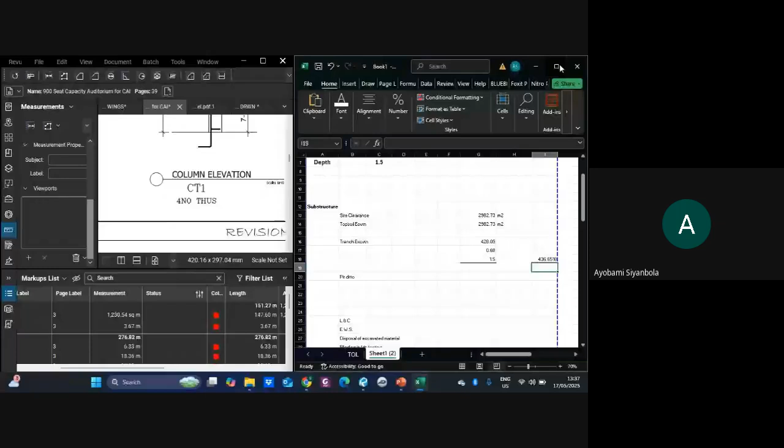Do you get, sir? Yes, I got you. All right, okay, so any other question? What's that? Is there someone with a question?

All right, no problem, I think we should just go ahead. So now, what item are we treating next?

Hello, excavation. Excavation. Is it the network or how am I getting this feedback? I think someone is not muted or something. Okay, no problem, that's fine, we'll just manage around that.

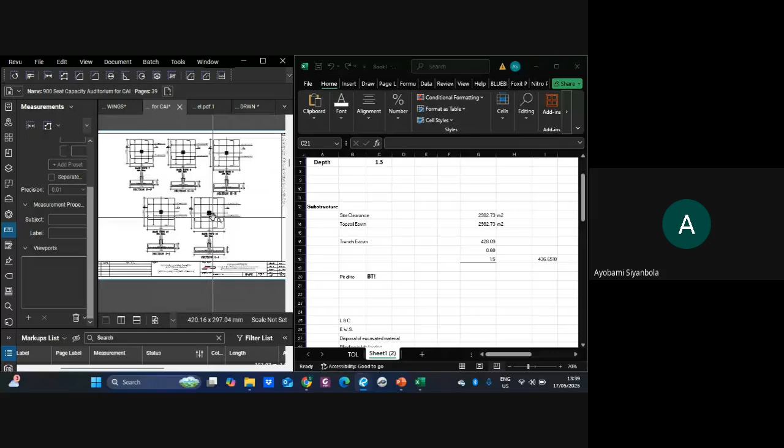Okay, so let's go to pit excavation. So we have BT1, base type 1, we have base type 2, we have base type 2, we should have base type 3, we have 5, 6, we should have 3. I just want to be sure where it stops. So we have 10, we have 7, we have 12, we have 13.

Okay. I wish that the students amidst us can understand, instead of us having these quantities in 3 places like this, if you have it in horizontal form it saves time, but it's fine. Just saying, when we have it in horizontal form, but for academic purposes I think we have to do it this way.

How many BT do we have? I think we have 17, or what did we count now? Okay, so that thing I thought I saw. Okay.

So now that we want to do our excavation for column bases, what do we need? We need... so this is what I'm saying, we would have to go 1, 2, 3 for everything. Okay, this is okay.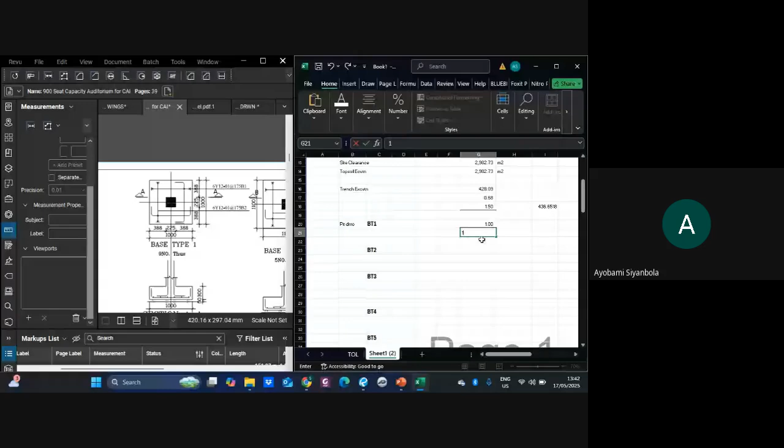This is okay, this is 1,000, which is 1 meter. Okay. So what's the next thing? What's our depth?

Should we use the same depth for our excavation for our pits as well, for this purpose? Okay sir, now I'm asking, should we? So we have reference, we have reference our depth up there. So we have this.

It's going to take a lot of time, but it's fine. How many numbers do we have? We have 9. Yes, right, yes sir. So we have a similar thing for our BT2.

But BT2 is 1.1 by 1.1. Yes. Okay. Okay, so let's say we have done.

Okay, let me finish. When I'm done with this BT2, let's just reference this. I would switch, and we get what I'm saying now. Okay, so we have 5 numbers for that. Okay, so from BT3 I would switch to...

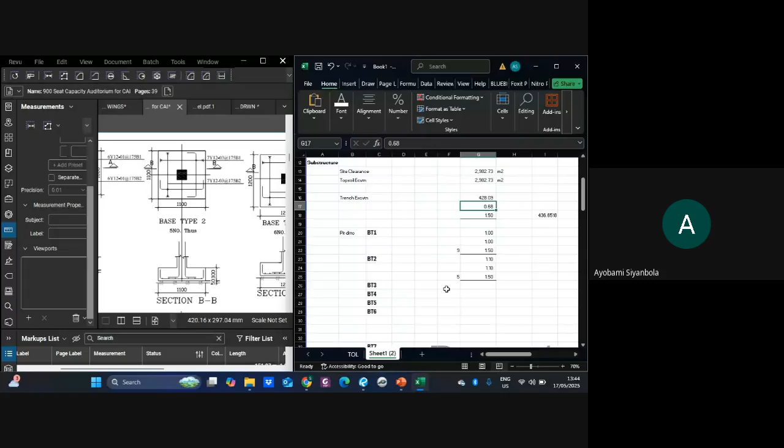who commented about the, what's it called, the other time, taking off arrangement. So if you can hear me, I hope you've gotten, with these few things that we have done, how to transpose if you are doing a singular line thing, so it's nothing of a big deal. It's something I was going to do the other time, okay, maybe I should still do it such that you can easily transcribe it, or transpose it now, to your taking off list, it will be very easy for you to do that.

I'll walk backward now. No, let me walk backward from here. What I want to do today?

Are we together? Yes. Okay, so we'll then still freeze this guy. Okay.

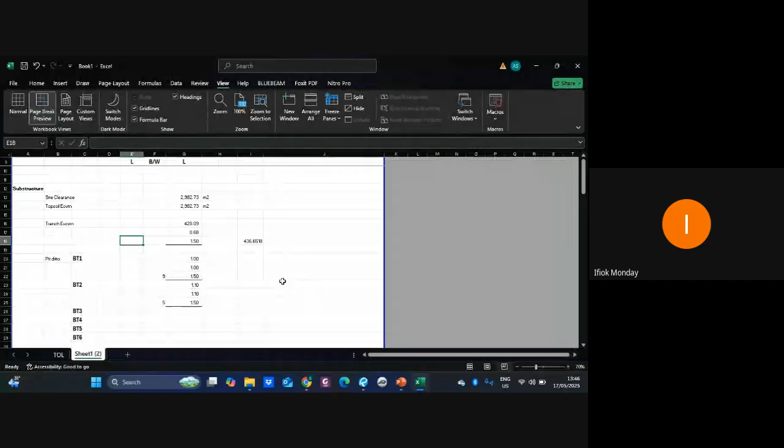All right, so okay, apologies for that. So you would get what I'm saying now. So now we have...

I guess there was a mix-up on this drawing. This is BT2, this is BT2 as different. So I think we should take this as BT3, if you would all agree with me, and take this as BT4. That's why as QSs we must be vigilant about all these things. Do you all get what I'm saying?

Yes, sir. This guy should be depth. So all right, so here we have the length. I will increase this guy. You will understand how fast you think I'm making. Just let me return.

So I've frozen this guy such that you know where you should fix one or two things. You can fix all these guys as well, depending on the requirement of whatever you are doing. So we have 1.2 here. Once we can understand what we are doing, we are trying to save the space of going all the way, because we have frozen this guy. How would you get that place?

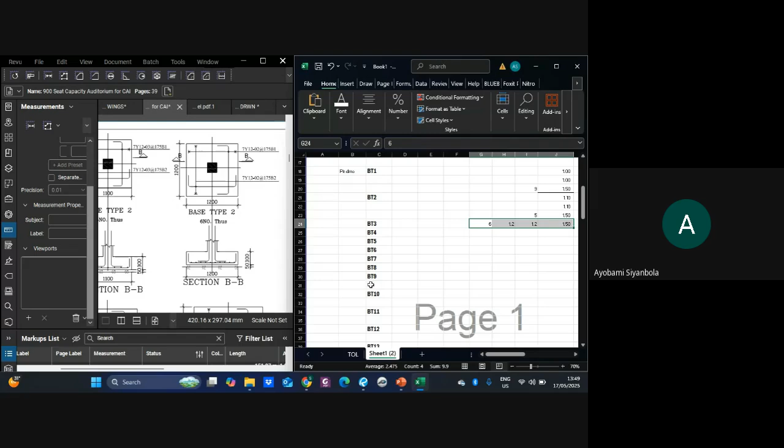So okay, so now I'll just replicate this guy. And mind you, I can actually lock this guy. We pick this guy from here because we are learning efficiency as well.

So we pick this 1.5 as a depth, and it's here. So how do you lock a column in Excel? You apply your dollar sign at the beginning of your formula definition, then before your number of that particular cell. You get what I mean now.

So I've locked this guy to be in C7. I've locked it by applying this dollar sign formula. You could see the other time that I was trying to extend it, it was bringing dash dash dash, because Excel will naturally be reading the cells after it automatically. But I've said that, okay, please don't leave that 7. And that's what I've done here.

Are we together? Yes, sir. Yeah, are we learning? So let's go, sir. Don't forget that this guy made a mistake here, and we are going to BT4. So BT4 is what now?

1.3. Just edit that. What's the number? We have it to be 1. You put your 1. BT5 happens to be 1.4 by 1.4. Mind you, imagine that, okay, I have a work that has more than 72 columns, column bases of maybe even 90, up to 90 at times. So when you have that, you just edit your work and you have short drawings as columns less than 30 or 40. You fix these things easily and you move on.

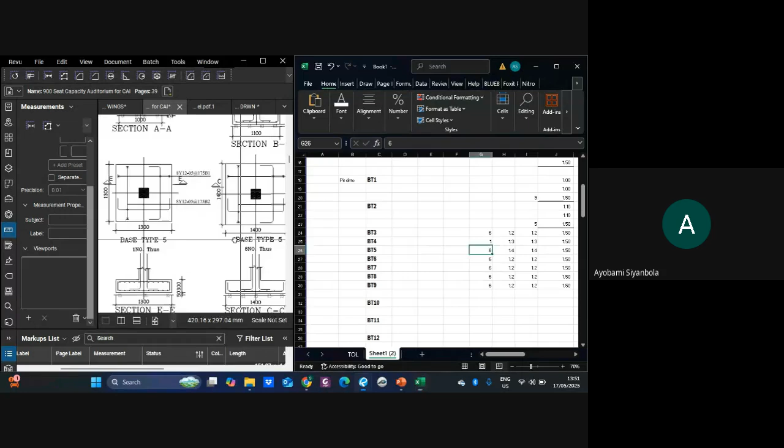So this is BT, we have done 4. This is BT, what am I saying? We've done 5 rather, 5 happens to be 8 in number. Are we together? So we move to 6, which happens to be what? 1.6.

1.6, how many numbers? They said 6 numbers. 6 numbers. So if you don't have these numbers, you know, that's another work for you as a quantity surveyor. So you have to locate this drawing, know this number, and do your column base schedule, the same way you would do your windows and door schedule. Are we together? Okay, yes, sir. So we move to BT7, which is like 1.7.

1.7. Since we have noticed the progression is increasing by 100mm, 0.1 meter, there is a formula you could use that could make that faster in Excel too, but there is no need now, let's just move on. You just have to have the mentality of, okay, anytime you are seeing a problem, how can I solve this and how can it be faster? That's what we are dealing with.

3, 3, okay, so 9 happens to be 4. Do you get this progression? Is it that the structural engineer, just based on the calculation and all, is increasing the types by 100mm? So we have this one to be 4, this guy.

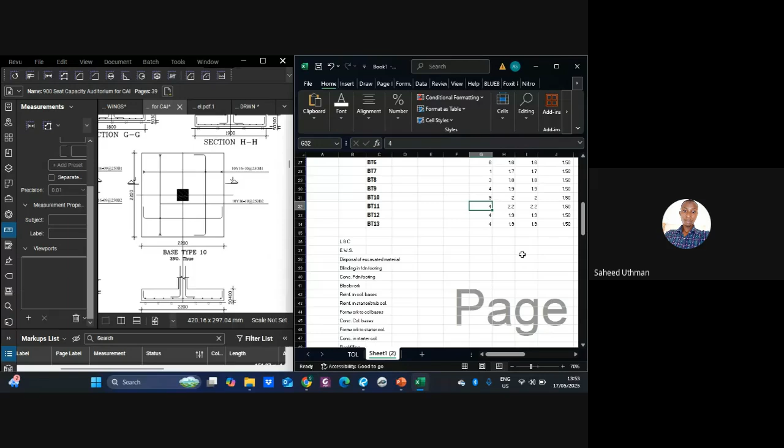We have a change now for the base type 10. Is it really changed? No, not necessarily, have it to be 9, right? 9, okay. Is it only our moderator on this workshop webinar? We are following, sir. Okay, thanks for following. Oh, this is 3, not 10. So usually at times you would have your cross-sectional sides not in square form. So for this base type 10 that we have 2.2 by 2.2, we could have 2.2 by 3 meter. Do you get? Yes. Easily you calculate that accordingly as well.

So let's go to base type 11. Okay, so I'm not sure this is correct, it's like they are repeating. Or wait, is it that I'm not getting it? We add base type 10 to be 2000 by 2000, right? So this is meant to be 11, 2.2, but they wrote 10. This is meant to be 11, okay, and 11 again. I guess they are just, this is just a repetition error.

Okay, so we have done 11, we are meant to do 12. This guy is 2.3 by 2.3 by 1. Then we are meant to do 13. 13 happens to be, is it even 13? I don't think so, this is just 5A.

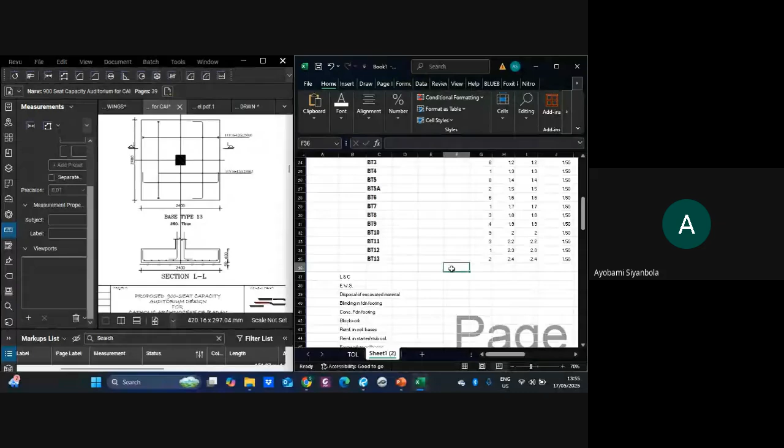Practically, we are done with the excavation, right? Yes, sir, we're practically done with the excavation. So let's just do this guy on time so that we have this.

Okay, I think we have made this description. Okay, you could do your templates whichever way that it didn't fit. You could do this guy to mean...

Are we together, please? Yes, sir. Very well, sir. Yes, sir. Okay, thank you.

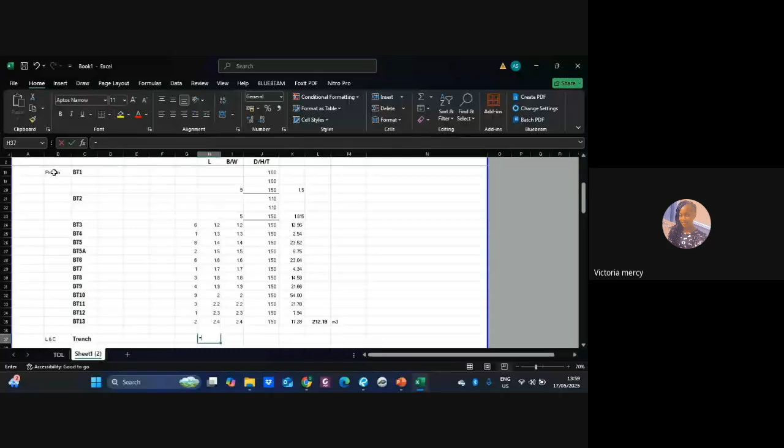So let's say for trench now, so what do we need? We need our length, we have that. Yes, and width. So we come here. I should have actually stated our width too, but let's just say we know our width to be 0.68, right? Yes, sir. And that's determined not by a constant, it could be 0.9, but usually determined by 3 times of your block work, depending on the structural engineering drawing. But from the drawing, we could see that that's what was done.

Let me just go over there so we can measure this. Okay, if you measure this, it's fine. Now if you have things like this, you can dim your measurements. Let's say 40%, and we all see that. You can select or control, and you can dim it down to even 1%, just for you to see whatever you want.

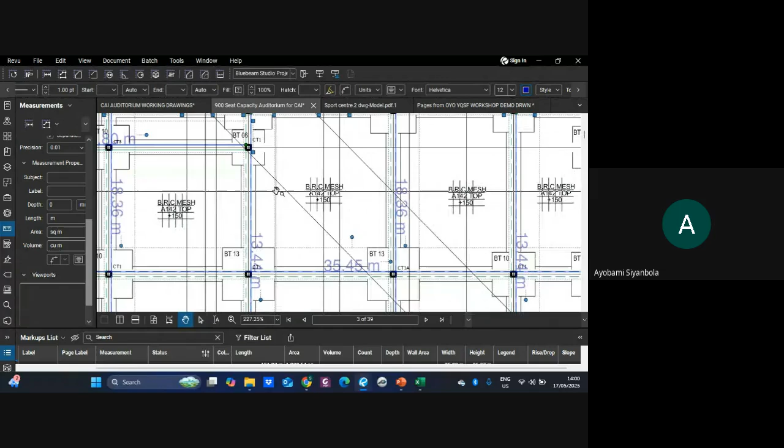Okay, let me show you, you can also change your line color. Let's say blue. Change your measurement color, let's say blue too. Can we see that? Okay, so let me take it back to 100. Oh, that's too much, I'm not feeling 100.

Okay, yeah, so it's looking somehow. Let's do a royal color, let's do purple. Is it purple or lilac, or magenta? I don't know, ladies, what do you call it? I don't know, let's just do purple.

Okay, all right, so that's just by the way. So let's go back to where we are leveling and compacting the bottom of excavation for the trench.

So when you don't have anything for Excel, you don't have to put 0. If I do this, okay no, I'm not doing this. Instead of going over the formula, since you don't have any item here, when you do this and put 1, it will still give you the same thing. Do we get that? Or you could just say this times this, and you are fine. Are we together? Yes, sir.

And this guy would be in meter square. Don't forget that we are trying to build templates. I could have just come up with the template already and we'd get our data, since we've done this on Bluebeam insert and all, good to go. But that's the purpose of this training. All right, so we've done that for the trench.

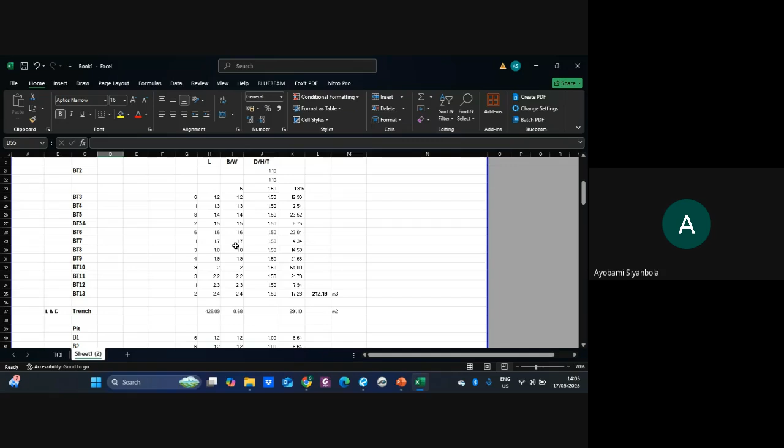Okay, so let me just, we could see that presently we are spending more time on Excel because we are trying to create a template that works easily with Bluebeam or even any other software. But so now for the trench, earthwork support for our trench, what would that be? To be like that. Don't forget that we have this, that's why I make sure that no matter where you are scrolling to, I've frozen this guy so that it can easily guide us into whatever we want to do.

Well done, sir. I'm beginning to see that for people who are just getting to know about Bluebeam, and I believe we have a lot of people on this call that are new to it, maybe we should tie it up here so people can go over and practice. Then we can have another series soon where we'll pick it up from here, having digested what we've had so far.

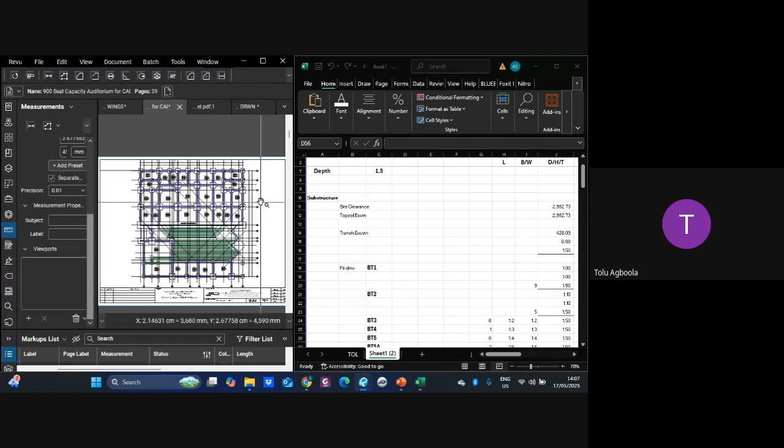Okay, that's fine. Even though we've not done so much as it were in terms of exploring, sir, I understand. Since we don't have so many people that have the Bluebeam software, following along may be a bit cumbersome for some if they haven't practiced well. So by the time we start moving again, we'll have more responses that can relate to what you're actually doing. All right, that's fine, no problem. It's okay by me, whatever works is fine.

Okay, maybe pending the decision, I would say if we can somehow work around completing this, not now but as against the next session. Take for instance this substructural work item, with this drawing we can work around completing the templates, all these things we're doing together. We're doing them together because I believe in you understanding things from first principle so that creation can be easy anytime, any day, from anywhere. So I would go ahead and complete this as against the next session.